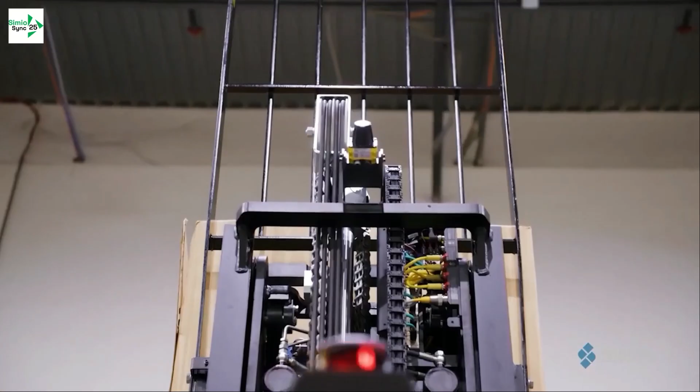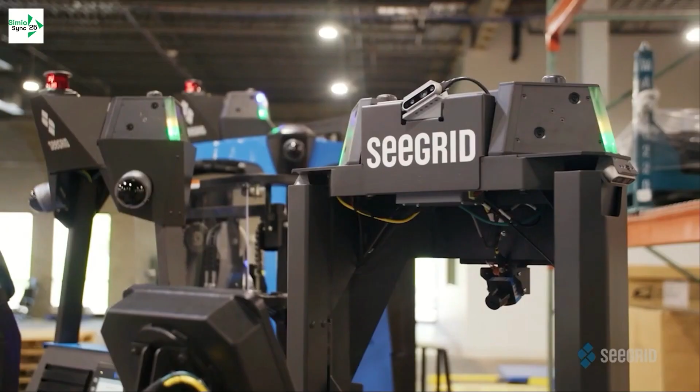There's a revolution happening in material handling, from manufacturing to logistics and warehousing. The future is autonomous. And at the heart of this revolution is Seegrid. Supporting more than 50 global brands, we continue to deploy our trusted and proven AMRs in live customer environments, completely transforming the way these facilities operate.

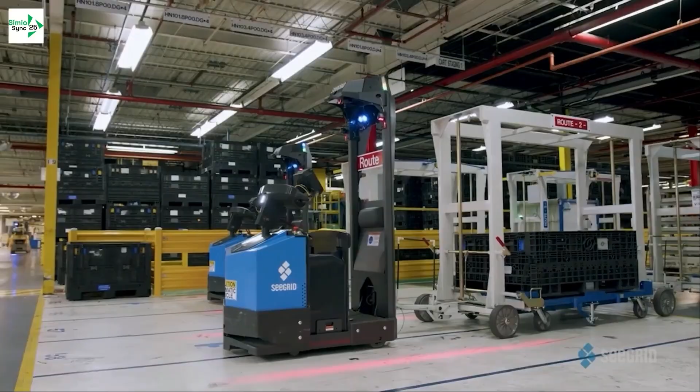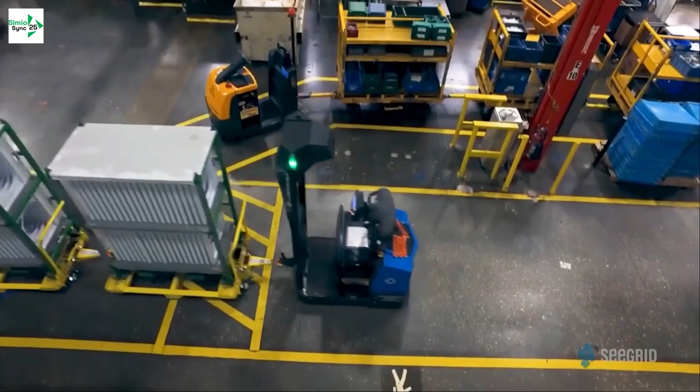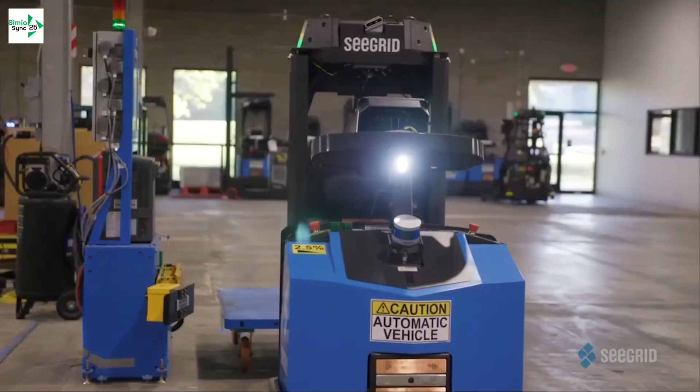Imagine manufacturing environments running as many as 100 AMRs inside a single facility, handling almost 80% of their non-conveyed material moves. Our customers experience significant labor savings and productivity improvements, often generating an ROI in far less than 18 months and reducing inventory levels inside the facility by more than 30%. We successfully automate mundane material moves, removing the need for some of the highest turnover positions in facilities today. And we're doing it all with safety as our top priority, as seen by our 0 reportable and recordable safety incidents to date.

Seegrid revolutionized infrastructure-free navigation several decades ago, built upon our stereo vision and 3D mapping technologies, and we continue to lead the way with automated material handling innovation. In the next series of videos, we'll explore how our pioneering technologies continue to add real value to our customers today. As industry innovators, we'll continue introducing new and improved technology to enable our customers to automate more than ever before. Join us as we dive deeper into workflow automation and explore the advanced innovations that are shaping the future of our industry. The journey has just begun, and the possibilities are limitless.

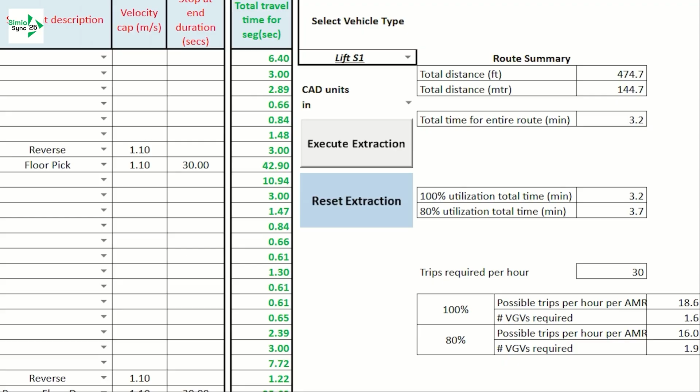Why use simulation? So the Seegrid application engineering team is part of our sales department. We create the technical solutions that our customers are going to implement. For years, we've been using an Excel model. It's tried and true. This is the way we've been doing it, and we believe in this method. We create a route in CAD and then extract that to marry that with our speed profiles using an Excel macro. This way we gain an accurate picture of what the AMR cycle time is and how many AMRs we need to complete the solution given the volume provided by the customer.

Knowing that our product has grown more and we are seeing more complex workflows with our customers, we knew we needed a different tool in our tool belt, hence discrete event simulation. It helps us better understand and visualize AMR interactions at key junctions to reduce congestion, such as where travel paths intersect. How many vehicles are intersecting at once? Am I creating a pileup? How can I reduce material exchange time? And that visual is very impactful for my team.

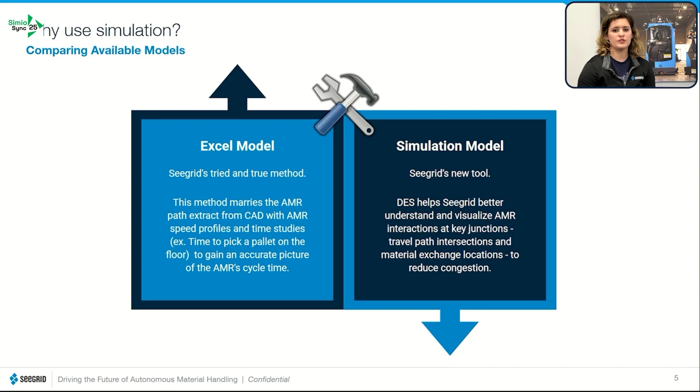Diving a little deeper into the Excel model, we will use this to make sure we can quickly arrive at an AMR fleet count, to tell our customer how many vehicles they are going to need, and compare changing material exchange time and how that affects the fleet count. For instance, does it take 5 minutes to exchange this cart? And do I need the same amount of vehicles as if that exchange time increased to 10 minutes? We'll also compare how changing volumes affect the AMR fleet count. For instance, if the customer has average volume throughout most of the year, but then a peak at Christmas, can we still use the same vehicles to help them at peak time?

As well, we'll compare how added route behaviors and zones affect the AMR fleet count. So if I need to create a slow zone in a specific area because there's a break room, or I need to create a fire door zone to integrate with a customer's fire alarm, we need to add those in here to account for that.

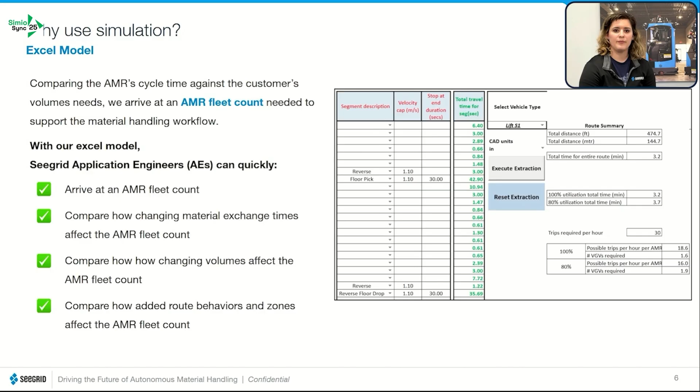Then looking at simulation. Again, another tool that will help us get answers to key questions and set up experiments so we can find those answers. For instance, does the solution over time see major traffic jams at intersection 10? Does this add significant time to our cycle time?

How can I reduce this traffic jam? This is more problem solving on the application engineers to see how is this solution being done and how can I help it? How well did we keep up with production volume with 12 AMRs?

We can easily set up an experiment using Simio software to see what if I looked at this specific workflow with 12, with 13, with 14 AMRs? How utilized are they? What is my vehicle count for that?

However, looking at Excel versus simulation, we don't always need to use Simio simulation for every opportunity. Like I mentioned before, my team is part of the sales process. So sometimes we encounter very quick deadlines to get an answer to our customers. Our Excel model is best to do that as compared to simulation.

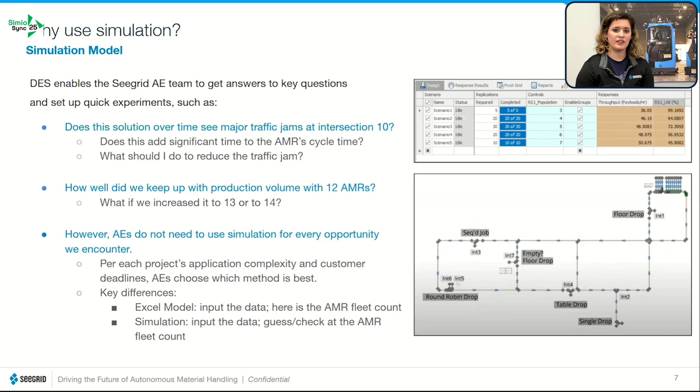And the main key differences are: our Excel model, you input the data, here's the AMR fleet count. Simulation, we're gonna input the data and guess and check at the AMR fleet count. So it's a different process, but our complex workflows are best used with simulation.

Setting the stage, single presentation of parts is a common workflow we see in manufacturing material handling. Often in manufacturing floor, space is at a premium. You might change your process, your setup, but you're still in a predefined space. So with many parts that need to be added to a product, you often see one container of that material, hence single presentation of parts. You might see two, but mostly one container.

And then as industrial engineers, we know that a non-value added process is not what a customer is paying for, which is material handling. So if there's one container of parts that gets down to 0 in the container, the clock starts ticking for that material handler to exchange the empty container for a full in as quick amount of time as possible to keep production moving at a steady rate.

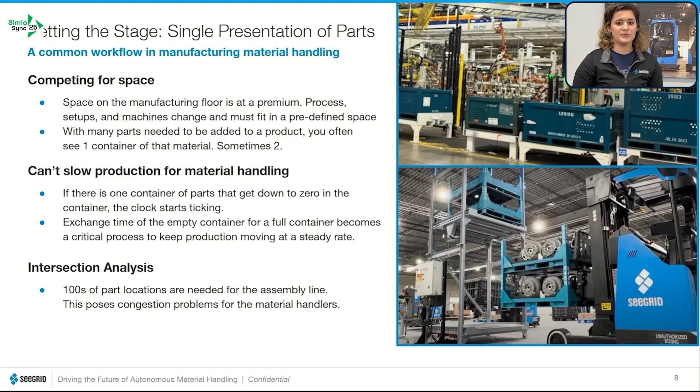And as you can imagine, if you have an assembly line of a car, there are hundreds of parts that are needed to assemble that car. So this poses congestion problems for the material handlers and also leads into congestion for automation as well.

So how does Seegrid support single presentation? We refer to this as job sequencing, but in the manufacturing floor, you might hear it be called hot swapping, moving that empty for a full container. So for Seegrid, a job is what the AMR does. It's going to pick up something here and it's going to drop that same thing over here. And then sequencing those jobs, job A can't start until something happens in job B. So that way we are sequencing those jobs.

So a process flow of job sequencing in manufacturing might look like an operator calls a container to be replaced through an integrated button press. That signal starts a job. We'll call it empty for full container for part 1, 2, 3, 4, 5, 6. Then the Seegrid lift AMR number 1 will pick up the empty container from the assembly line and take that to a location for empty containers.

Then AMR 2 needs to pick up a full container from a staging area and place it in that same position at the line. However, AMR 2 will not start their job until AMR 1 has fully removed the empty container from the line. This ensures that the full container does not arrive before the empty, and we're minimizing the time that an operator is without parts at the line.

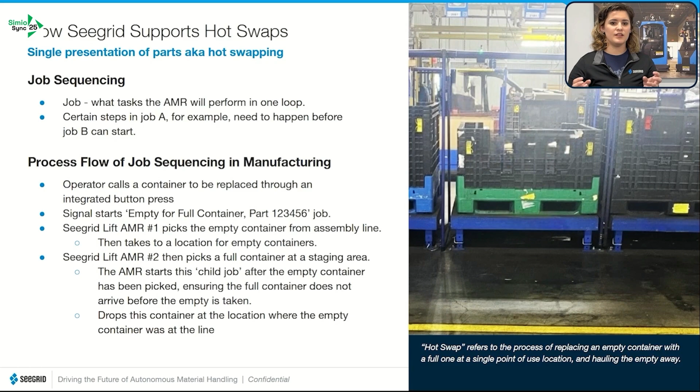In 2024, we began our journey to find a simulation partner for discrete event simulation, adding that other tool in our toolbox. We went with Simio because we saw that there was going to be a great partnership there. Highlighting some of that collaboration, very specifically, when we needed to troubleshoot our model, it was great to have link labels turned on and off. It wasn't a feature previously in the software, but our developer worked with the Simio team to make sure that was added in the next software release to make troubleshooting a lot easier.

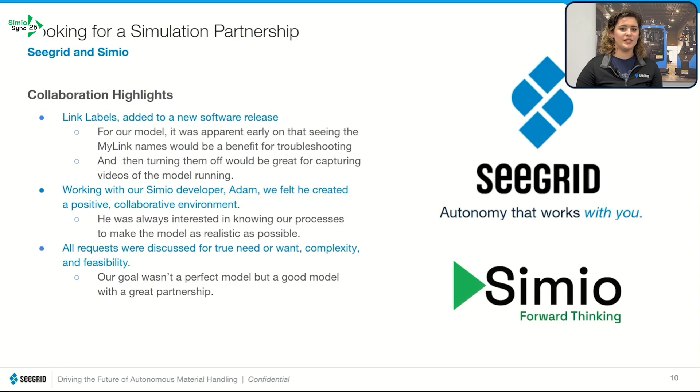As well, we can't give enough praise to our developer, Adam from Simio. He created a positive collaborative environment. He was always interested in our product, interested in what we were talking about, made sure to understand what our actual problem was, and we felt really great about this model representing how Seegrid would do this in the real world. And then all requests were discussed for true need or want, complexity, feasibility, and we knew that this was going to be a good journey. And our goal wasn't to create a perfect model, but get a good model with a great partnership for the future.

I'm Sophia and I'm going to talk about the modeling approach. Starting from the model data, I'm going to describe the inputs and outputs that are required for the simulation model. So while setting up the model for each specific application, the following items have to be configured.

First of all, the pallet throughput at each pick location, the AMR routes in the facility, which can be extracted from an AutoCAD file, the vehicle type, because the simulation was built around the characteristics of the different vehicle types of Seegrid, the number of vehicles of each type. This can be determined through an experiment section in the simulation, but it's good to have a general idea.

The job process, which is the pick and drop locations, as well as the flow of the AMR tasks, and the battery type. This is optional if auto charge is needed, and it would help include the downtime due to battery charging. So once we add all these inputs to the model and we run the model, the following items

can be derived. A visual simulation of the process flow of the application, the vehicle utilization, which includes on-the-job time, idle, and charging if applicable, the intersections traffic, which is a graph that shows the wait time per intersection, and the job times, which is the average time for each pallet movement of the application.

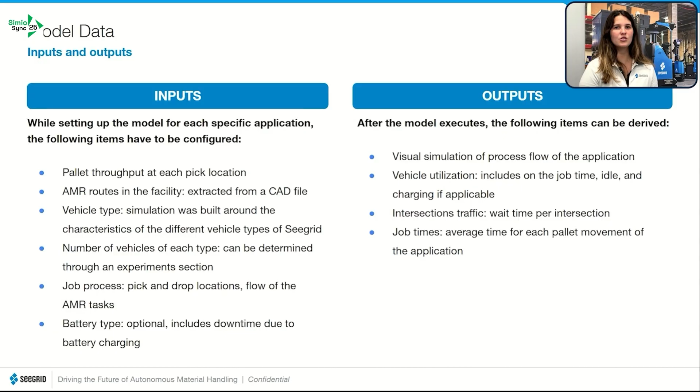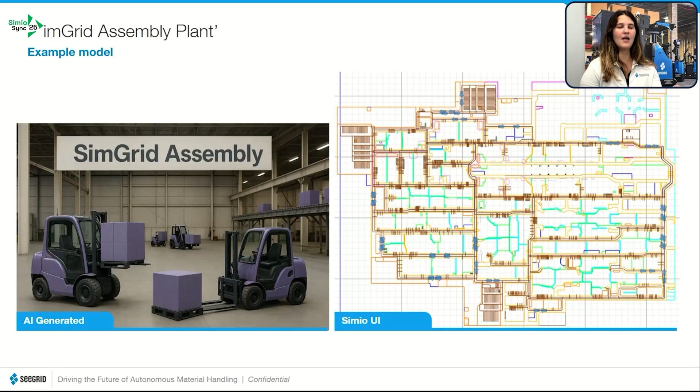This is an example model that we use a code name for: SimGrid assembly plant. On the left, it's an AI-generated image of how this could look like, and on the right is the Simio UI that's showing the whole factory, and then the routes, and all the small segments you see are pick and drop locations that we are servicing.

Moving on to some key model features. Job sequencing is the first one I'm going to talk about. So job sequencing is a Seegrid-developed feature that allows replacing a full pallet with an empty one, or the opposite, with dedicated full and empty put-away locations.

The ability to do a hot swap with two vehicles allows us to work at time-critical applications and make the fleet more efficient. As we can see from the video, we have two trucks that are dispatching at the same time. One is going to the exchange location, picking the empty pallet and taking it to the empty storage space.

The other one is taking a full pallet from the full storage space and taking it back to the exchange location. So we have basically exchanged an empty pallet for a full at the exchange location. Then both trucks go to the taxi stand and are idle until they get the next job assignment.

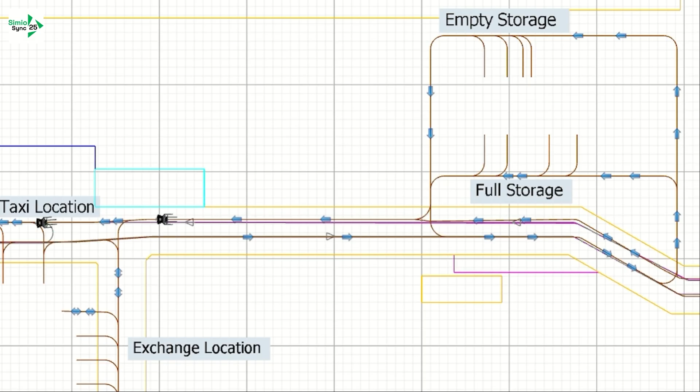Another model feature is the intersections. So bottlenecks can be created in the application and they cannot be easily identified without specific data. Traffic management is configured based on our fleet management software, and then using the Simio dashboards that show the wait times per intersection, we can identify the bottlenecks.

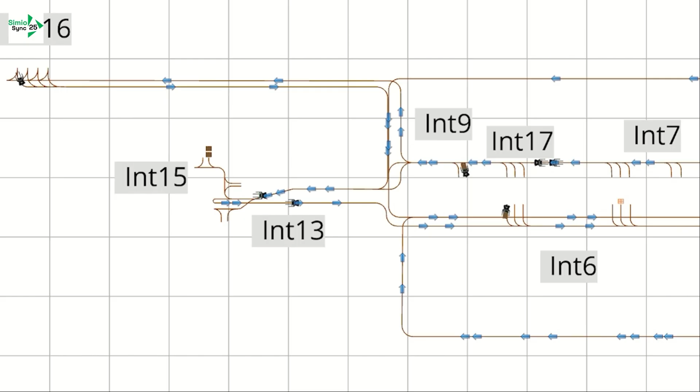As shown in the video, we can see that there is a specific point that many trucks want to occupy, so a queue is created. Here we can see up to 3 vehicles queue behind each other, which is completely fine, but looking at the simulation and then the intersection wait times, you can identify bottlenecks and potentially change the routes to avoid them.

Some model capabilities. So multiple applications is a key model capability. It is often needed to scope multiple applications with different AMR types within the same facility. It is very helpful to be able to see the fleet orchestration and how the different AMRs will interact.

In the 3D video, you can see 2 Seegrid vehicle types, the Seegrid tow tractor and the Seegrid lift truck. They have different routes, they service different applications, but we are able to visually see and get the data for their intersecting points.

It is often needed to scale up an application by increasing the throughput, adding more pick and drop locations, and therefore requiring more vehicles. In the example above, we can see the example Seegrid assembly plant application.

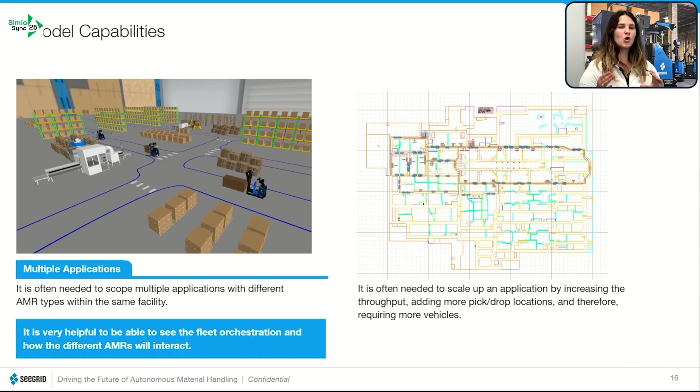Initially, we were scoping just a part of it, which is the rectangle on the top of it, and then eventually we had to extend the scoping efforts to include the whole factory. So from Simio, we had a baseline that we could build onto.

So you have to have a rule of which utilization you prefer. You don't want to have 95%, you don't want to have 25% either. So you just pick the number of vehicles based on the utilization that you would want. After you select the number of vehicles, you can run the whole simulation, see how this is running, and then get the dashboard with all the results.

Every project has challenges, and since there is little revenue in easy, it's our job as solution providers to overcome them. This is a quote by our CSO, David Griffin. We keep this quote in mind while trying to overcome our hurdles.

The first hurdle that I'm going to talk about is educating the entire Seegrid application engineering team. As always, it takes time to get used to a new process and work with a new tool. The timeline to how this progressed is initially we asked for team feedback during the development. So there was an initial release training that the whole team had to go through and give us feedback to make sure that we have useful for everyone simulation.

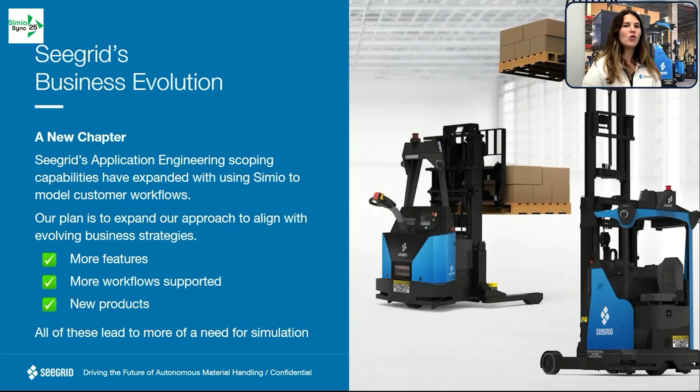Our plan is to expand our approach to align with evolving business strategies. That includes adding more features, being able to support more workflows, and adding new products. All of the above lead to more of a need for simulation as the applications keep getting more and more complex.

To recap, we saw how Seegrid application engineers added a new tool to their tool belt for solution design and discrete event simulation using Simio. We also saw how a complex real-world problem in job sequencing, or hot swapping, is simulated in Simio, and we saw the great start to a new partnership between Seegrid and Simio. Thanks for watching.